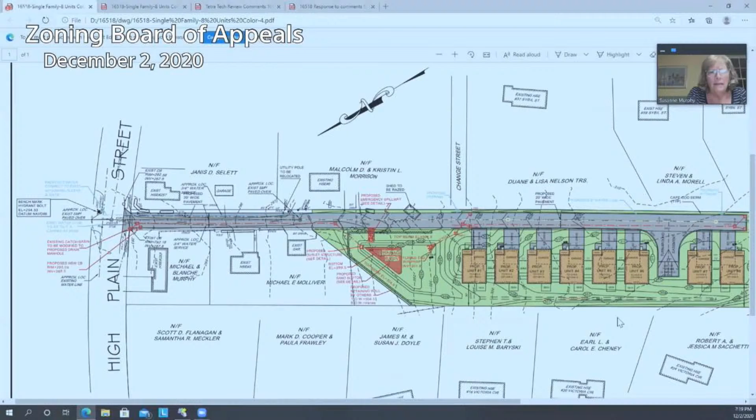It's for Rob. Rob, the flow into Victoria, do you feel the swale is sufficient? Because it does slope down. Yes, I do. Let me pull my screen back up so I can share it. It goes from, isn't it like a 4-foot drop or so to the people on Victoria? The relatively flat yards, it's relatively flat through here. This is the high point right in the middle. The swale right here is like almost 2 feet, I have about a 2-foot depth in the swale. So it's not going to carry 2 feet of water, it's 3 feet wide, so it would take a lot of water. Trees will help absorb it. And some of the water going down the swale, we're not taking any credit for anything infiltrating. As a matter of fact, during the initial submittal, when I sat with Carl, the town engineer, he made a comment about making this swale crushed stone - 3 feet wide, maybe a foot of crushed stone.

I didn't want to do that, not because it's not a good idea, but when you do the calculations and put the stone in, I'd have to provide a calculation showing it as a recharge trench, and I can't show it 2 feet above groundwater to the bottom of the stone. So I think it's a great idea.

I think it would have some benefit down the road, just to crush stone it. It's easy to maintain, you just pull the weeds out. Or you keep it grass, and the grass will do the same thing. It's really a flat swale, less than 1% of pitch through that swale, so it's relatively flat.

So it will travel at a slow pace through there, giving it some time to go into the soils, but we're not taking credit for that in any of the calculations. That's just Mother Nature that we don't take credit for.

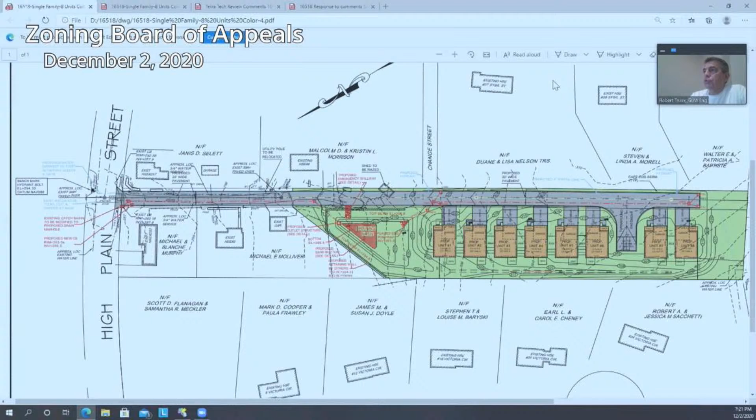Okay, and where is snow removal going to happen now? So we can push it - I showed it right off the end of the parking spaces. This is ideally the best place, because when it melts, it would go down in the swale.

So you'll have cars - will there be a program with the HOA that there's no parking during snow, something like that? We could put that in the homeowners agreement, that during snowstorms, like you do in town, there's no parking on the streets. Yeah, right, so that same kind of condition would work.

Okay, good. I'm happy to see it off the end of the parking, because obviously they're going to push snow to the end. But ideally the best place to put it is between units 6 and 7. It'll melt in the grass right there and flow down the swale, getting a lot of treatment.

They're gonna push some snow there, they'll drive and plow, and it's natural - they can't pull it all. They'll plow the road, it'll go to the edges, shovel the driveways to the sides. And ideally the turnaround is the most pavement, it's wider than the rest of the road, and deeper because of the visitor parking. So that's where the most snow is gonna accumulate, in that intersection and on that turnaround.

And the fire chief hasn't seen the turnaround thing yet, right? This just came yesterday afternoon. Yeah, this just came yesterday afternoon. I would think - nobody's commented on it yet. Now, this is an improvement.

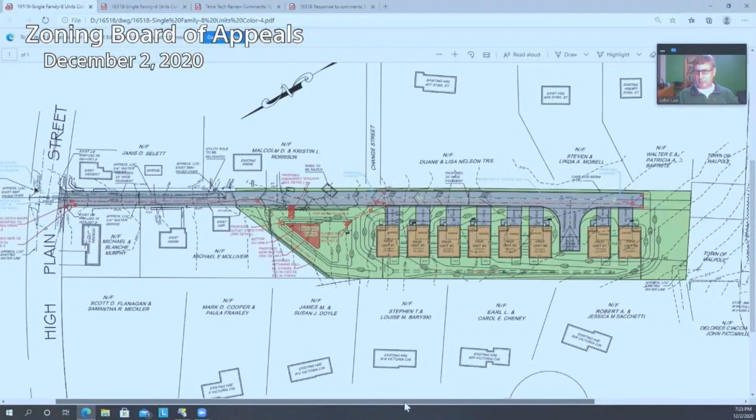Rob, page 13 is great with the construction sequence plan. How soon would that swale be implemented into the construction phase once the land is cleared on the Victoria Circle side of the property?

I'm sorry Drew, I'm having a hard time hearing you. My apologies - the swale facing towards the... in the construction sequence plan, how soon would that be implemented or built out once the land is actually cleared?

So that should be implemented in the grubbing and clearing in the initial stages when they do temporary runoff. So what we have is around Unit 1, we're showing on the erosion control plan a temporary basin. So they would build a swale up along the proposed road, and a swale up along the property line - those would be temporary swales.

Because if they built that early on and grassed it, it would just get clogged up with silt, so they'd have temporary swales. And there is erosion control around that side also - if you look at the erosion control plan, I have it all the way down that side property line, with the sock and the silt fence. I can't recall exactly, but we have erosion control almost around the entire site.

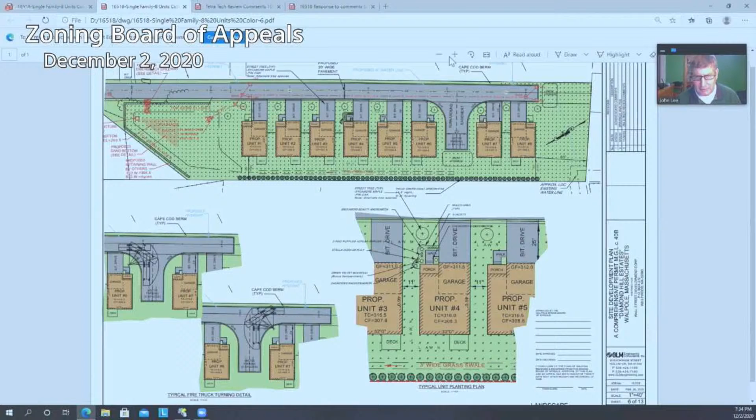I think the one I'm most interested in is the buffer to the people on Victoria Circle, and you said those are going to be green giant arborvitae. Are they like 6 feet on center, 10 feet on center? Did you go into that kind of detail? Yes, I did, it's right there. There's 4 to 5 feet in height at planting, and 6 feet spacing. Okay, that's very, very good.

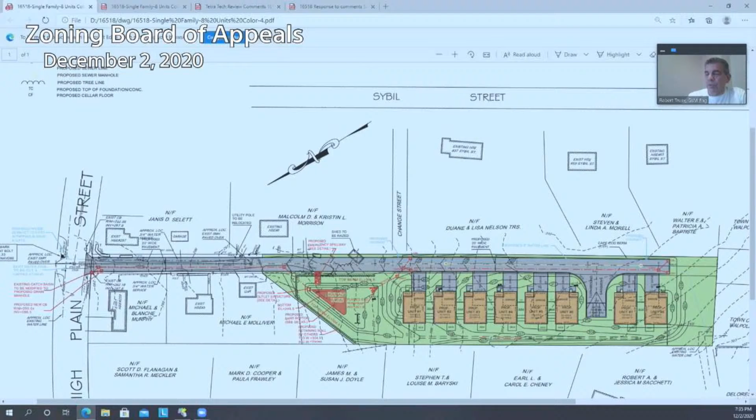How about the depth of the retention basin, or the storm drainage basin? What are we talking for a depth of that? It goes from about 301 to 304. The top of the berm is 304.8. The 100-year flood is 1 foot below the top of the berm, so it would be 303.8 for the 100-year flood depth.

So we're talking it'll be about 3, maybe 4 feet. Max 4 feet. Yeah, if it was max, yeah.

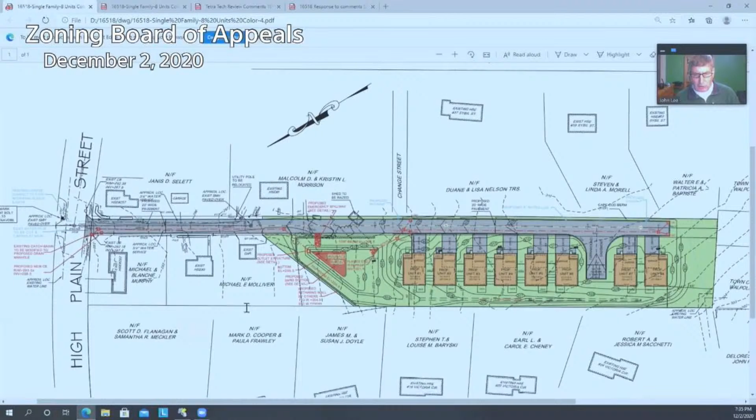As far as phasing, this is a really small piece of property, just over 1 acre. How are you going to stage construction, and is that included in your plan? Can you, I don't have the sheet up, but do you have the sheet plan set in front of you? Does everyone have a copy? No. I'm gonna try and pull mine up.

I had put on the erosion control plan some phasing, some sequencing of what we talked about, Lou and I, and this can be fine-tuned, especially with input from the town engineer. But the thought process was... I don't have the erosion plan up on my screen, I'm going to see if I can find it.

So the thought process was, where the existing shed is to be razed at the end of Change Street, about station 3+25, the thought process was to go in and clear the site, put your erosion control barriers in, and then bring the utilities - water, sewer, the drain - all the way up at least into the site where the existing shed is to be razed, about 3+25.

Those people on house number 6 and house number 3 need new water services on the new mains. So the main would have to be brought in far enough and tested to get those people online early on in the project. And then the idea would be to put the binder course down up to a minimum of 3+25, and once you get all that done, we would go in and do the project itself.

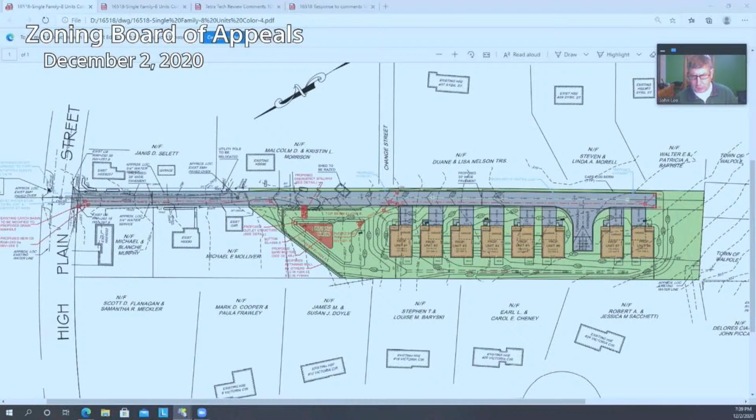Okay, thank you for that explanation. And my final question for you, Mr. Truax - distance between the buildings? Eleven feet. Okay.

Okay, that's all I have on my plan. So, other board members, any other questions, comments?

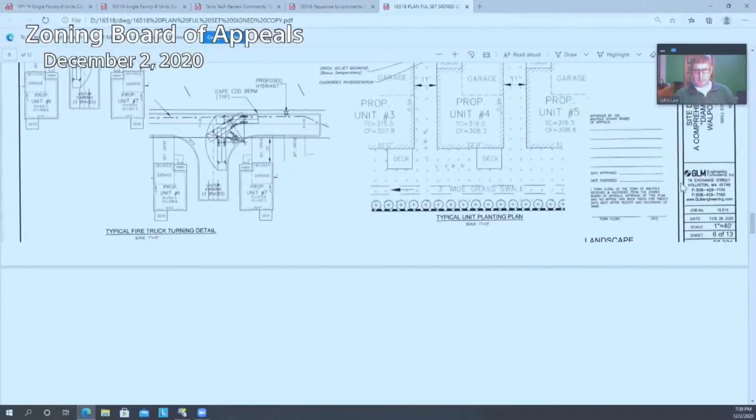We have town counsel with us. George, how are you this evening? I'm very good, thank you, Mr. Chair. Good. Do you have anything for us or any comments that we should be looking at this point? No. Okay, thank you.

So the next thing is for peer review on this for the changes that have been submitted. And again, I think it's really positive that a lot of the issues have been addressed.

Mr. Petrozzi, where are you? How do you feel about the peer review for this next phase? Well, other than the number of buildings that have changed to single families, I mean, I think the comments have all been addressed in Rob's letter, and so I really look at this as sort of a checklist that the peer reviewer can just go down his list and say, did we comply, or does he need more information? So he has to take a look at it, obviously.

So what I would like to do is send this out to Tetra Tech, ask them, recognizing that a lot of these things have already been addressed, what is the wrap-up peer review for this? That's the way I'd look at it on this.

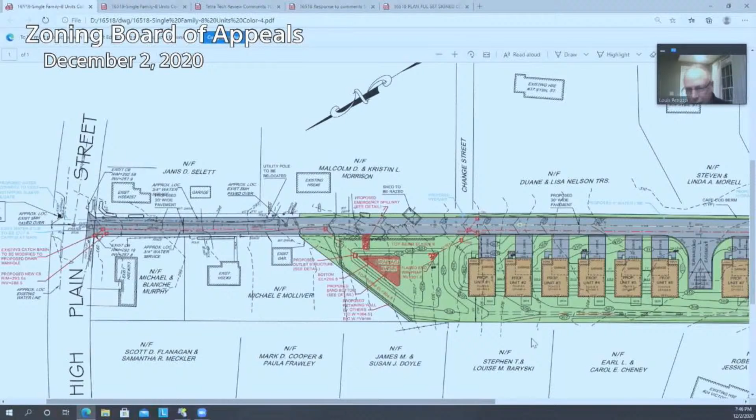There is an existing easement right now with a water line already installed that comes from Victoria Circle, shown at the end. It's on the property line of the last lot on Victoria Circle, and along the property line of the Kasha property. So it is on our property, and it does not connect to the Summit Ave property. From what we've discovered, we've had conversations with DPW and the town engineer — the Summit Ave water pressure problem is in a completely different zone than the Victoria Circle zone. But we won't be incurring any activity on the town of Walpole property.

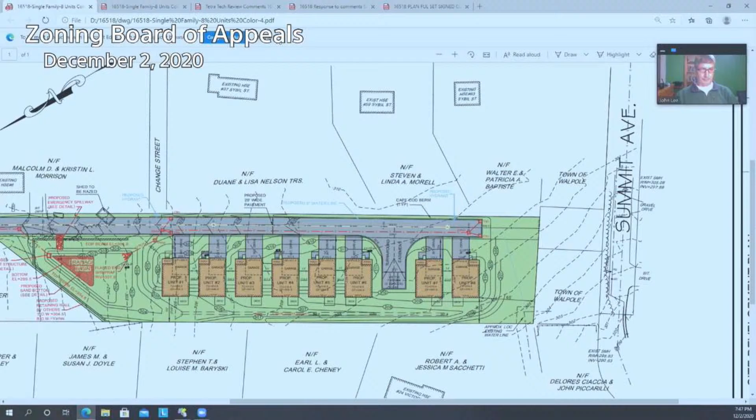Okay, thank you for clarifying that. I get it. Okay, it's already there, in other words, Mr. Chairman. Yep, it's already in the ground, we're just connecting to it on our own property. Correct. Okay, good. Are there any other people with questions or comments? Ashley?

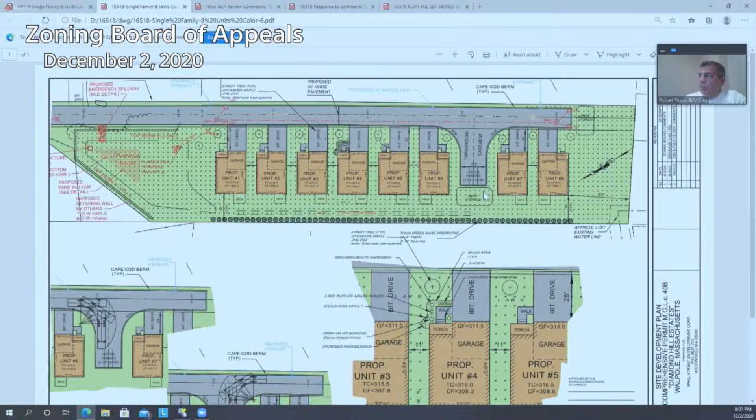Thing with the fences, though, they'll push snow on it, it'll just break, and then we won't have the fence. Just something maybe to join, I could see. We could do a second row behind it, so we have space. I could leave space from the parking to the row of shrubs so we could still pile some snow, and do a second row of arborvitaes right there, build it up. I think that would give them a second row of screening as well, so the lights wouldn't push through. Yeah, I think that would be helpful. Thank you.

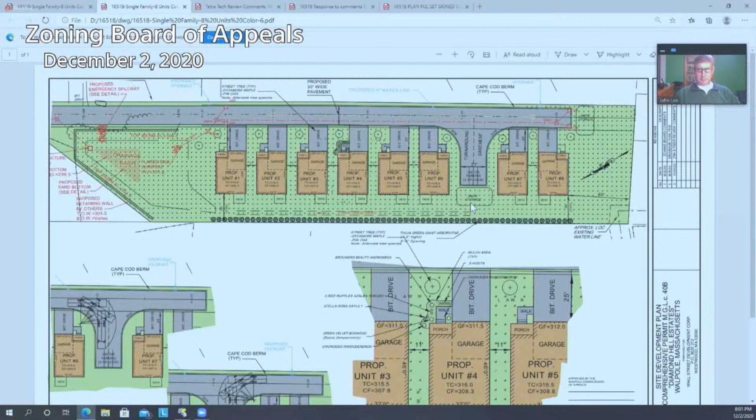So it looks like, I think she just put her hand down. Janis, did you still want to talk? Mr. Chair, do you want to hear from Janis? Yeah, that's fine if she has something to say. Okay. Hey, Janis, you're back, thank you.

Sorry, I wanted to say that I know Victoria Circle's been sent a letter, I don't know if the applicant has ever read it because I've never spoken with him. And I am going to be greatly impacted by this whole project, being that I am right on the corner, and all cars that come in and go out, traffic and food deliveries, you name it, there's that. So I had outlined it in a previous letter, so I'm not going to take the time now. I can put it in a letter again about what I would like to have done here to help with the impact it's going to have on my quality of life and privacy here.

And I just also wanted to ask, when you said that the water usually improves when they do the looping of putting in for a project, what if it adversely affects it? Then what happens? Well, Mr. Chairman, may I?